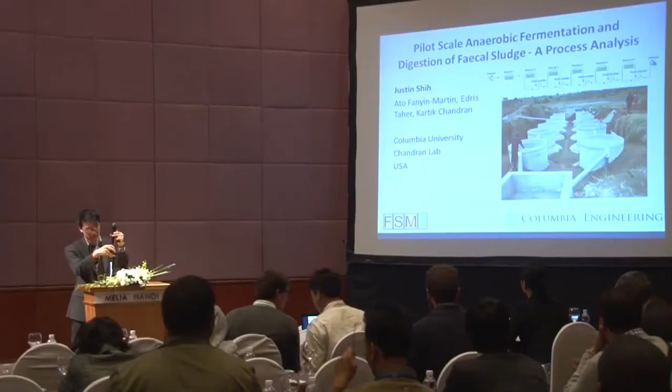Hello, can you hear me? Yeah. It's pretty clear? Yeah.

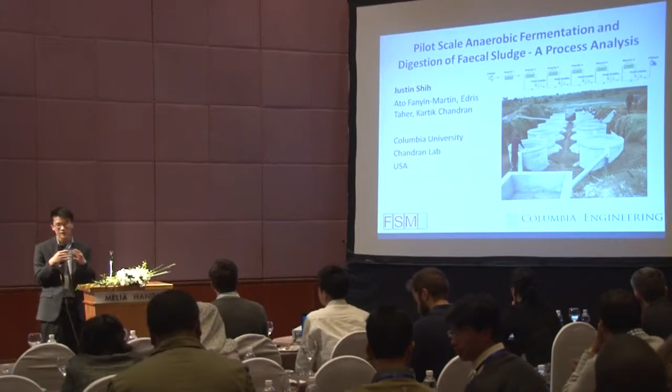Okay, my name is Justin. I'm with Columbia University with the Chandran Group. I want to begin by saying our group is pretty excited about being here this year because the work in Ghana has been in progress for the last 3 years. The first year was construction of the site and procurement of materials. Then a year of operation at the pilot scale, and the last year has been data analysis and modeling work. So we're really excited to finally be presenting it here. So thanks for being here.

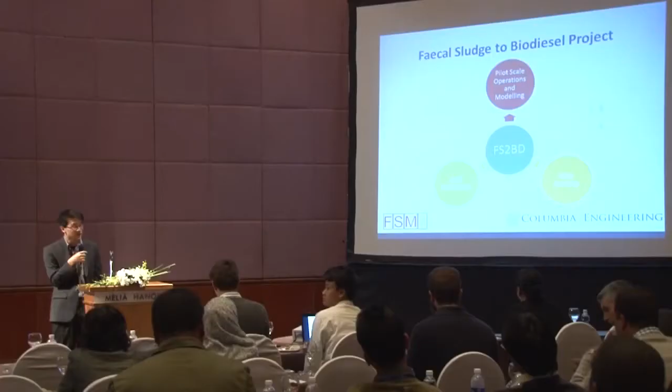So this project is the Fecal Sludge to Biodiesel project. There are actually going to be 3 sessions here at FSM about this project. Right now it's the pilot scale operations and modeling. Tomorrow morning, Kartik Chandran from Columbia is going to be talking about lipid production from VFA, and Ato Fanyin-Martin from KNUST is going to be talking about step feeding work that he did at Columbia. But today, it's pilot scale operations.

So why are pilot scale operations important? Worldwide we have a lot of anaerobic fermenters and digesters, but the scales are very varied, and there aren't many heavily measured, heavily monitored examples we can build from. With pilot scale fermentation, we can actually start looking at the variability of fecal sludge as it comes in. From characterization studies we all know fecal sludge is very variable, but in processes we're not incorporating that variability. Running at pilot scale, receiving about half a truck a day, we can actually feel, smell, and see all the variability coming in. So this is very beneficial for us.

Second, not only are fecal sludge concentrations varying, we also have to consider loading volumes. As everybody knows, vacuum trucks are all different: different ages, different capacities, and when they arrive on site they're not always full. So if you plan to take one truck or 2 trucks, you have to account for variable volume as well, not just concentration. And with field operations, unmixed reactors are what we're working with.

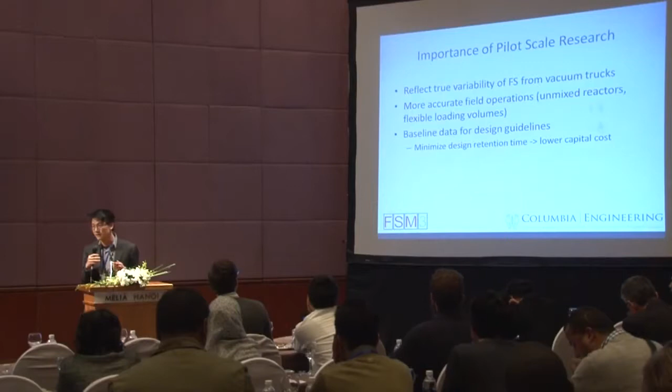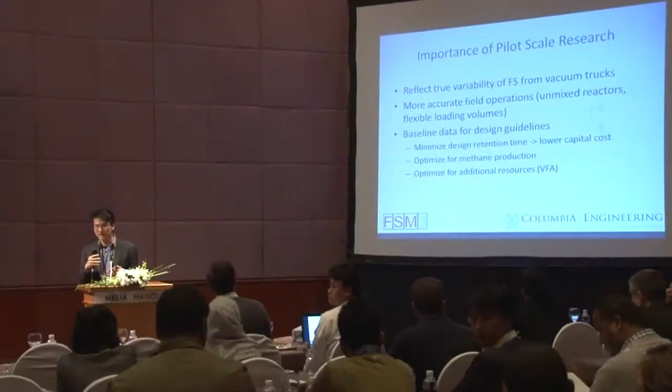All this pilot scale data gives us a baseline for what fermentation and digestion actually look like when processing at truck scale, which allows us to form conclusions later. In terms of design guidelines, sizing digesters by residence time is key, because a very large digester is expensive and somebody might not want to pay for it. So we specifically looked at how much retention time you need to optimize methane production, and how much for additional resources like VFA, volatile fatty acids. If we can limit reactor size, costs go down, and maybe this will be taken up.

Okay. So our project, we had a very strong emphasis on pilot scale field operations, but at the same time, we needed to incorporate process modeling with it. And the baseline data we got from the pilot, but the process modeling allows you to start answering questions about how do we want to size digesters for fecal sludge? How do we want to design these systems? Because right now, these guidelines don't really exist.

In addition, if you have a built system and you have a model for fecal sludge, you can start looking at how the reactors are actually performing and how to optimize them. So modeling allows for the before and the after.

Okay, a little bit of information about what we were doing at the pilot scale. We had 5 months of startup. We used rumen from an abattoir for the inoculation. We ramped up the loading. This was a 5-month period. In terms of full operation, we had 5 months of loading, sampling twice a week.

2 trains of 6 10 cubic meter reactors. In terms of operation, we're only using 1 train at a time. The second train allowed us for staging, it allowed us to clear some things out if we needed to. But the key point is 6 10 cubic meter reactors. So they're a good size. HRT is pretty low, 2 to 4 day retention time in each reactor.

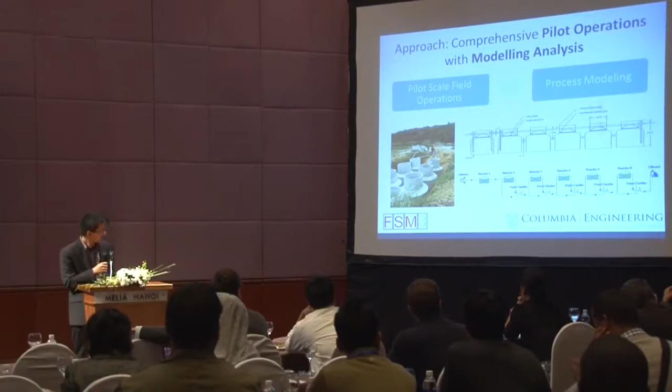I want to again emphasize realistic loading conditions. You'll notice we had 2 periods, period 1 and period 2, they were about 2.5 months. Period 1 had very variable loading volumes, and one reason for that is it coincided with the wettest 2 months of that year. There's very heavy rainfall, and trucks were pretty hesitant to come to our site. We were right next to a waste stabilization pond. It was getting really muddy. We had situations where trucks had to be pulled out by other trucks, so they didn't want any of it.

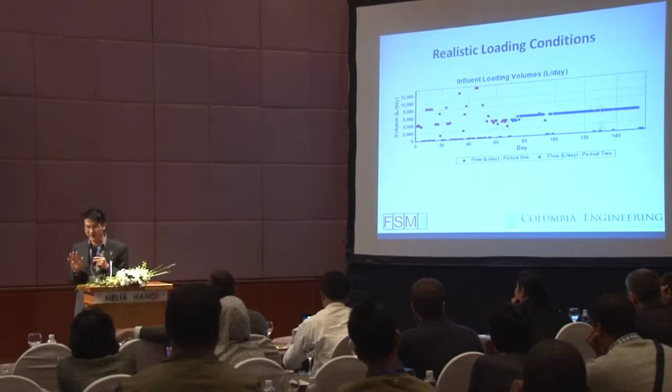And what this meant was we were trying to be very careful engineers, set loading volumes every day, but it's difficult in the field when you have to rely on trucks that are coming in. And so the volumes get higher and lower because if we missed days, then we would compensate by adding more.

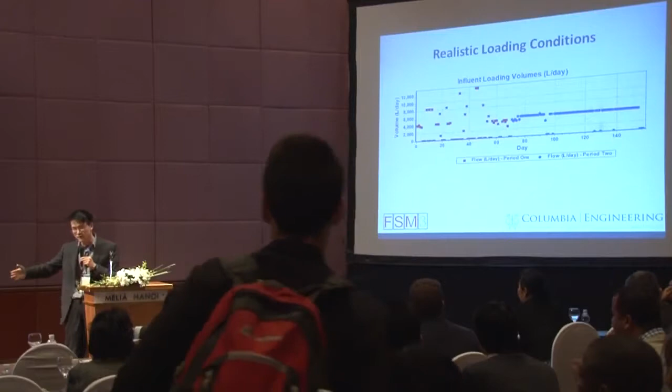Now, period 2, one explanation is I left after period 1 and somebody else started managing period 2. That's not the reason why. It was that the weather started getting drier, and we said, wait a second, we have another 2.5 months. This is a great opportunity, we have this variable loading. If we're really good for these 2.5 months, we can make this comparison. Because if you have to rely on trucks, knowing if variability is okay is something we really want to know. Right? What is the effect of loading volume variability?

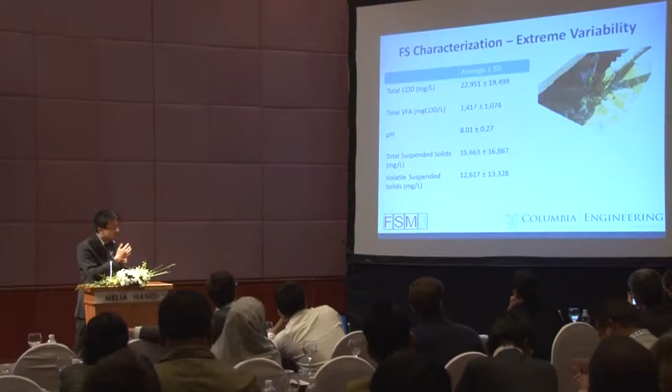Fecal sludge characterization, what we were measuring was pretty consistent with past studies. A lot of variability, so you have these average values, but the standard deviations are just as high. It's what we were seeing. So the VFA numbers were suggesting that fecal sludge was coming in pre-fermented, and to go beyond that, we suspected that it was also arriving pre-digested.

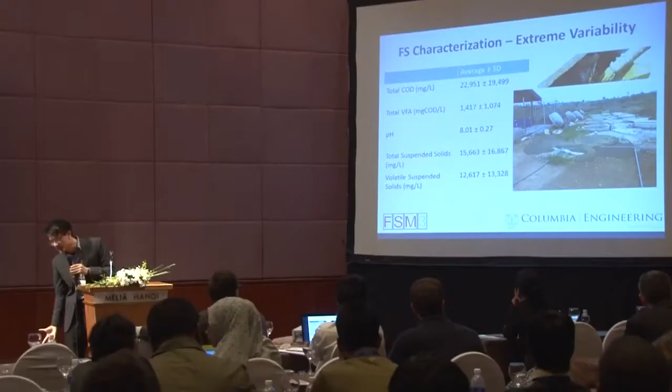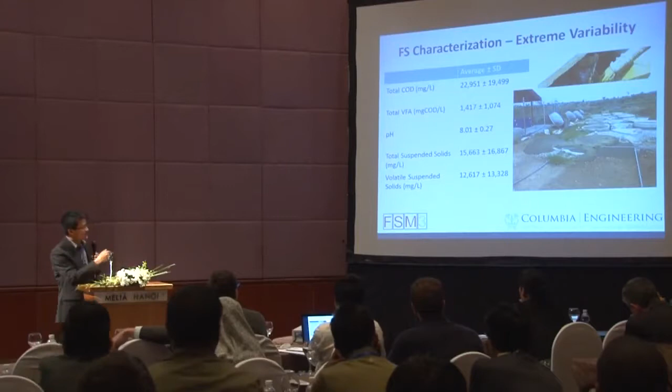And one piece of evidence is that occasionally we would load the site in the afternoon, and then in the morning we would see intensive digester foaming, all of this gas production, and we'd have to go and shovel up all of these things. And so this was one of the big sparks in our mind about what's going on in fecal sludge. What this is showing is it's very active material. It's not just sludge, it's the bugs that are eating the sludge. And this was suggested by these messes we had to keep cleaning up.

We can measure fecal sludge through regular parameters, but if we want to go deeper into design, we need to go beyond these. We need to think about what else is in the stream.

Okay, process modeling approach. So our approach for the model is we wanted to identify the key characteristics for fecal sludge and for fecal sludge fermentation and digestion. And what this basically meant was when we were adjusting these parameters, we were doing so very carefully with our knowledge of the anaerobic digestion process. Because in the end, we wanted to minimize the amount of adjustments we were making. We didn't want to adjust 20 parameters, 30 parameters to get some perfect model. We wanted to learn what was happening, what's different about fecal sludge, and what's different when you ferment it and digest it.

Evaluated through the calibration, we looked at COD fractionation, readily biodegradable and biodegradable. We looked at the influent microbial concentrations, heterotrophs coming in, methanogens. We looked at reaction rates for the 4 key parts of anaerobic digestion. And we looked at the solids distribution because we had an unmixed system, so of course we had some distribution. So these details, we don't really have time to go into them, but during the Q&A or afterwards we can really start getting into it.

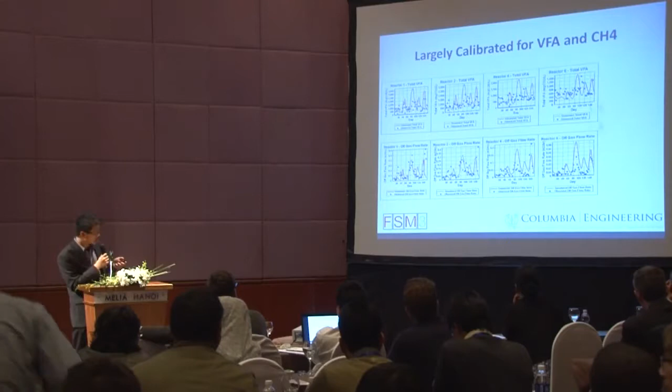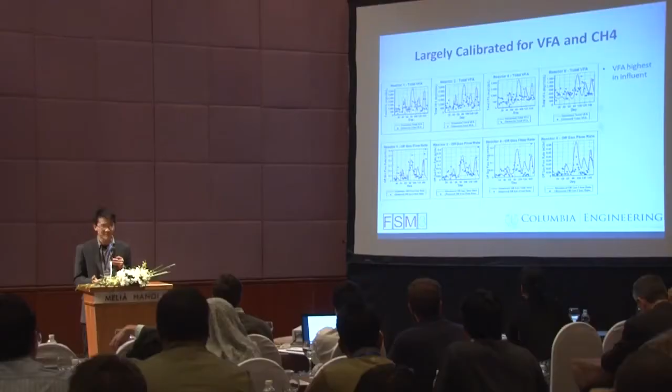What we found was VFA concentrations were actually highest in the influent. That 1,400 milligrams per liter, that was the highest, and it only decreased from there. And we were not expecting this. We were expecting high VFA concentrations in upstream reactors. We expect material comes in, and now you have your VFA, but that wasn't the case. For gas production, we saw maximum gas production in that same first reactor, which also took us by surprise because we were expecting gas production to be higher in the downstream reactors.

And so what both of these are suggesting is, again, the same point. Fecal sludge is active material. It has heterotrophs, it has methanogens, it has material in it that we need to consider. And because of this, that's why we then see VFA only going down and gas production. It's coming in with methanogens, now you're seeing it highest in reactor 1.

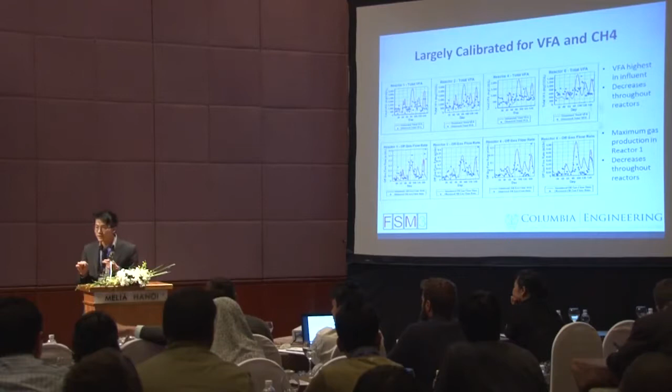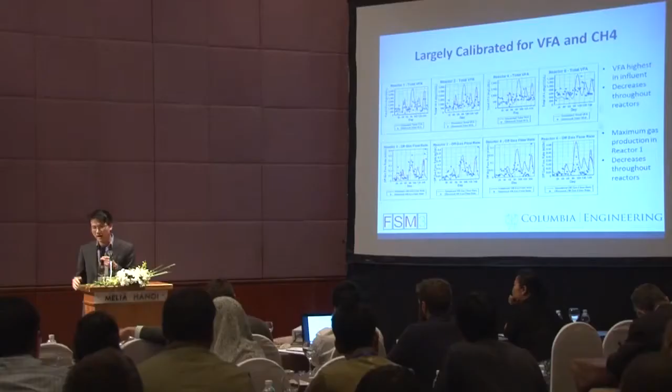And so if we're going to do a new design for fecal sludge fermentation, fecal sludge digestion, if you only care about gas production, you may not want to go for 15 days, 30 days, 60 days, which are the regular numbers. And we're not talking about pathogen reduction. If you're only caring about gas production, you're getting those high efficiencies right in the beginning, and it's something to keep in mind.

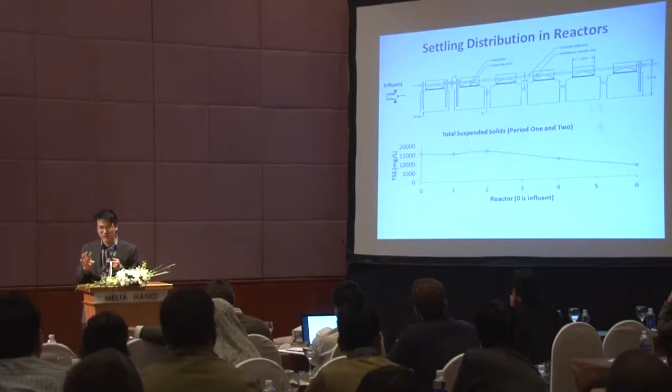The other point is, yes, we have this decreasing profile for gas production. But if you remember, we had an unmixed system. So we have decreasing solids distribution as you go there. And even when you normalize for the concentrations of solids in the reactor, and you look at gas production, you still see that from an efficiency point of view, it's highest in reactor 1, and it only goes down as you go down.

So we looked at, I forgot to mention, we looked at fecal sludge from public toilets. And I want to mention this: public toilets, that word public comes from the fecal sludge operators, those vacuum truck drivers that are coming in. They say we have public material, we have public material.

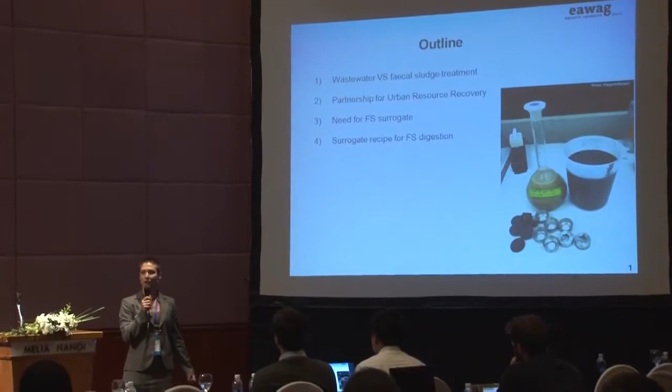First I would like to go quickly through the introduction, coming back a few years to look at how we have developed wastewater treatment compared with fecal sludge treatment. This will lead me to present the need for fecal sludge surrogates and how we can use them for anaerobic digestion.

We all come from the wastewater field, even though we are here to treat fecal sludge management, because all the treatment technologies we try to apply were actually developed for wastewater. But wastewater treatment wasn't developed in 20 years, it was developed over about 100 years, and we have been testing different solutions at different scales — large-scale, mid-scale, but also small-scale tests at laboratory conditions. The goal was to understand mechanisms and optimize efficiency.

And that's where I'm coming from. For fecal sludge, we still don't have very good efficiency, otherwise I think we would have something else to discuss than what we are all speaking about here. It's a quite new field of research — I would say the very first researchers began working on this in the 80s, so that's 30 years, not 100.

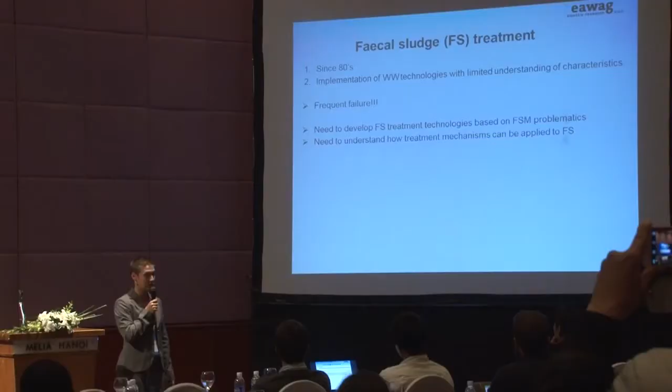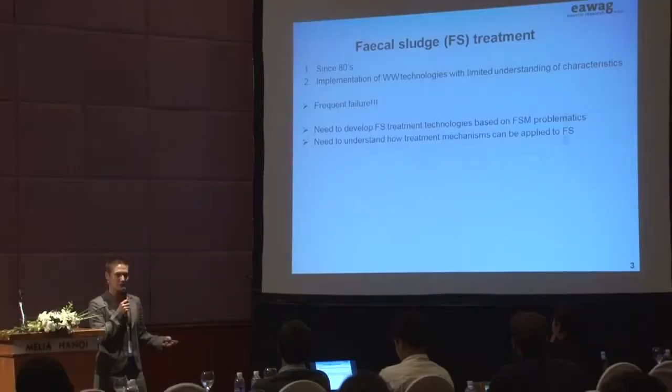We have been implementing wastewater treatment technologies for fecal sludge. That's something strange, and often we didn't really have time to see how this is actually implemented — how can we really use fecal sludge on wastewater technologies? We could observe lots of failures, for several reasons, but also sometimes technologies were simply not well adapted. So we concluded that we first need to develop fecal sludge treatment technologies based on fecal sludge management criteria, properties, and problems.

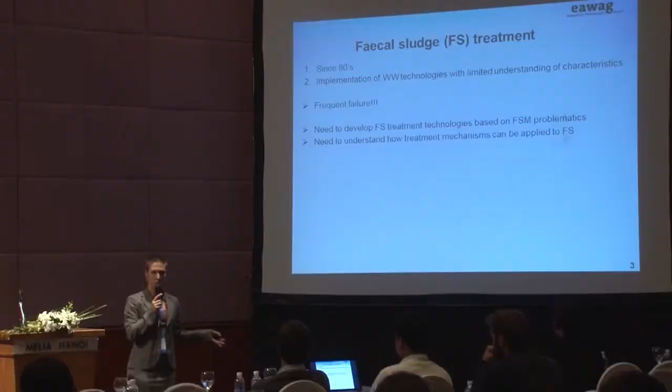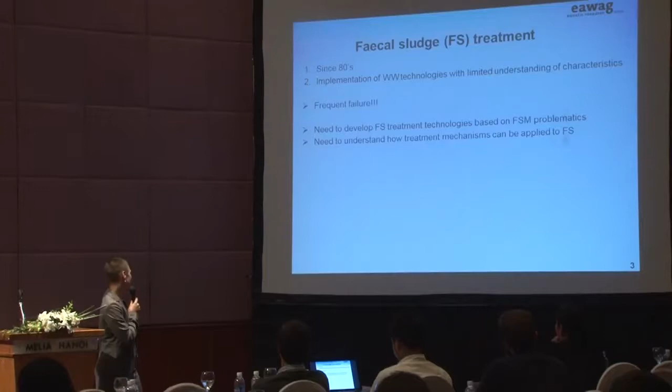That's quite logical, but also, as we have seen, there are different levels of tests, and it can be useful to have first small-scale tests. We need different types of scales, and small-scale tests can be used to understand how treatment mechanisms can be applied to fecal sludge.

So the point of my presentation today is that for wastewater treatment we have been using a lot of different surrogates, but we don't have these surrogates for fecal sludge. I have already been asked by several colleagues: do you already have your synthetic feces? We really want to use them — not only for anaerobic digestion, but also for other purposes.

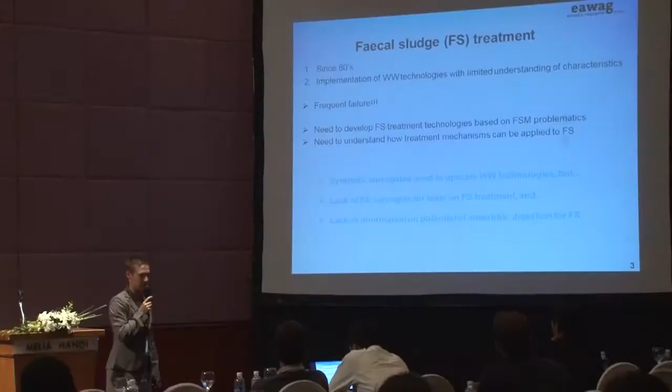As we have been discussing throughout this session, there are still needs for understanding in the field of anaerobic digestion of fecal sludge. Today I will mainly speak about fecal sludge from septic tanks. This is a liquid waste — it's important to note that — and it's liquid waste that is already partly stabilized, so it's not the same as the case from toilets.

I would like to present this quickly in the framework of a project I'm running here in Vietnam. It's also interesting because it's based on the Vietnamese situation. The project is called Partnership for Urban Resource Recovery, and its main goal is to assess the potential for anaerobic digestion of fecal sludge. All of this is considered at a centralized scale, not at the scale of a single toilet.

We are conducting several activities. I don't want to go through all of them, but today I will focus mainly on optimization of anaerobic digestion for fecal sludge. To really understand process efficiency and how we can optimize it, we need a constant substrate to do the first tests. I see heads shaking, I don't know if that's yes or no, but this can be useful to understand what mechanisms are actually efficient in producing biogas, inactivating pathogens, or degrading biological matter. It's also sometimes useful to perform tests without changing external conditions.

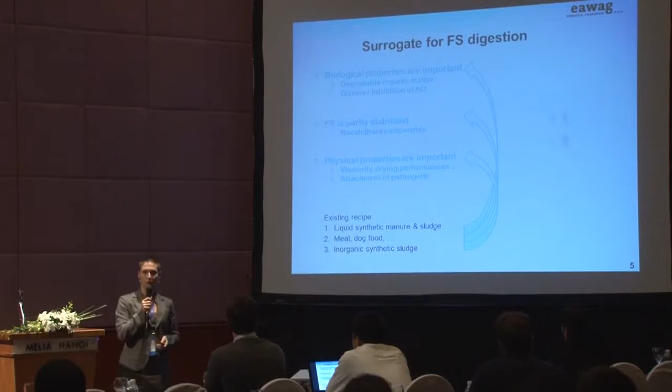So until now, we still lack the perfect recipe, I would say, which I will now present you today for these tests. The objectives of our work was to develop a recipe for reliable and replicable tests representing biodegradation potential, heterogeneous solid content, and also being able to adjust it to different fecal sludge characteristics. Our goal was also to have controlled and safe-to-use components so that anyone can do it in different countries, and to obtain a recipe that is easily and rapidly reproducible, again in different countries. Finally, of course, as I said, I would like to use it on optimization of anaerobic digestion, and that's what's coming now.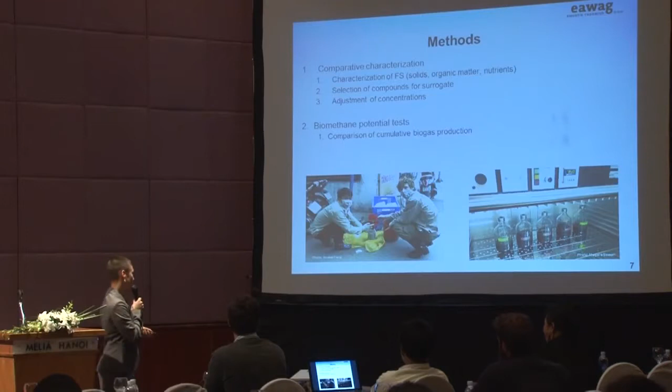We could actually do that. That was the first step, but we also wanted to verify that these similar sludges would have a similar behavior when we put them in the digester. And we wanted to monitor that through biogas production. So we also conducted biomethane potential tests. Thanks to our previous presenter, so that I don't need to present the whole methodology now.

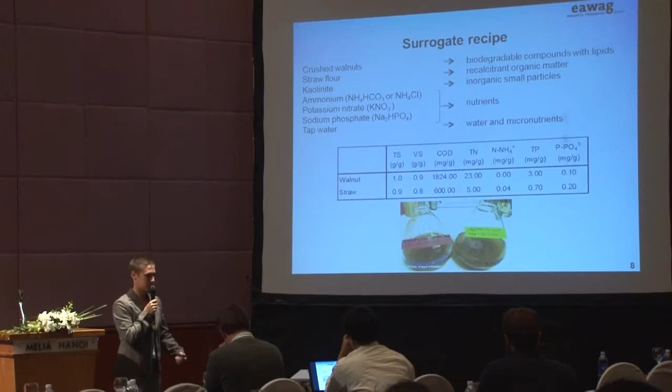And that's the surrogate recipe we obtained. So it might be funny, but that can be useful too. We used crushed walnut and straw flour. Straw flour mainly representing recalcitrant organic matter, and crushed walnut representing more available organic matter and accounting also for lipids. But you can use other kinds of vegetables. We use kaolinite to represent inorganic small particles, and different chemicals can also be used to represent nutrients. And of course, the water content can be adjusted based on water. You can just see here some characteristics of walnut and straw, which are interesting because they are quite different, and that makes it easy to mix to reach different characteristics.

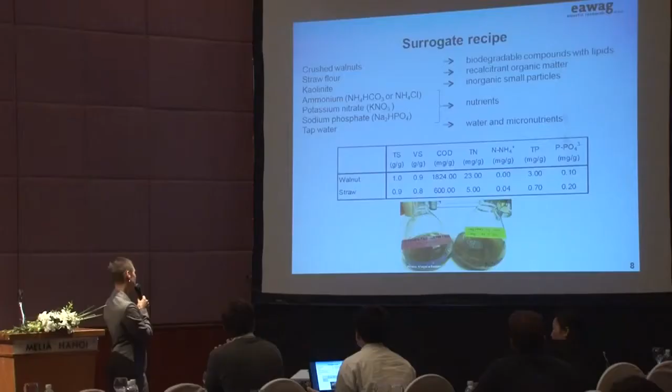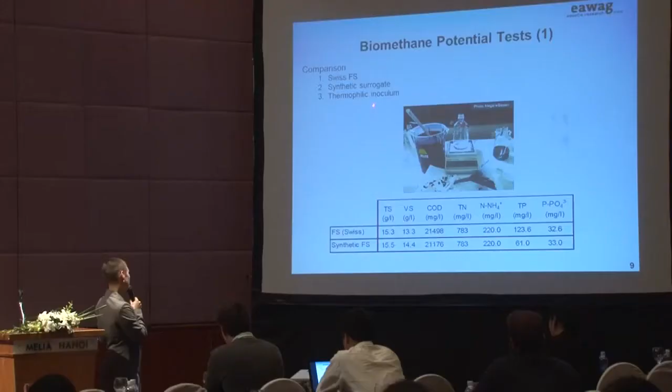The biomethane potential test we did in Switzerland, and we did that with Swiss fecal sludge, so also from septic tank, and therefore we had synthetic surrogate adapted to this Swiss fecal sludge. We conducted the test at thermophilic temperature, so at 55 degrees, and you can just see here that we could obtain similar properties between the Swiss fecal sludge and the synthetic fecal sludge, except for total phosphorus.

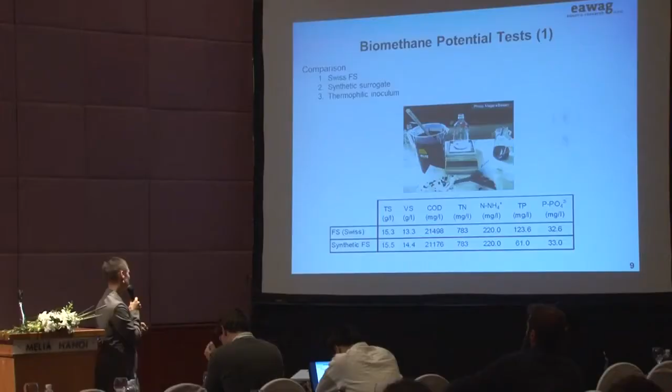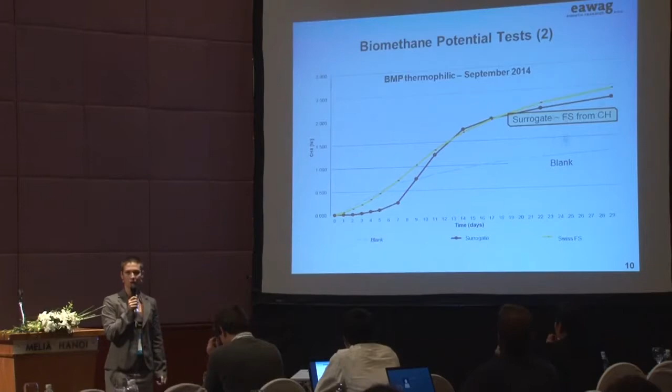We had other results, but just to quickly present you. I hope you see the line for the blank, which is here. So the blank was only thermophilic inoculum, the production just due to the inoculum. Something interesting is that first, we have actually production of biogas with fecal sludge from septic tank, which is very often discussed because people often think we can only produce biogas with fresh fecal sludge, but actually also with partly digested fecal sludge you can produce biogas based on this data, which is very limited data.

With similar characteristics, we obtain similar biomethane production between 10 and 30 days of digestion. That's only one test, so we will conduct more. But we had different behavior at the beginning, where we had inhibition due to probably VFA accumulation in the surrogate. So this is something we can fix. But the interesting thing is that at the end we have similar production for similar characteristics.

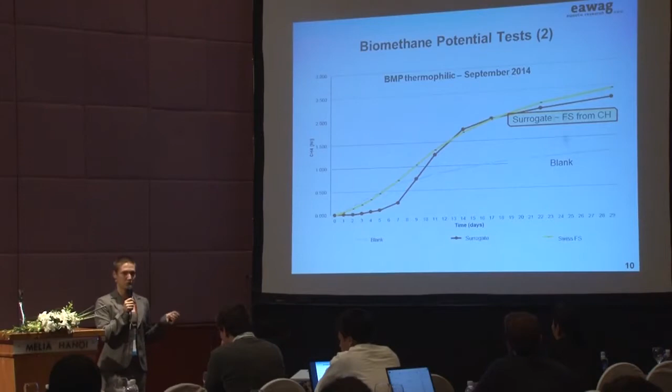I will be using these, so that was just a side study to perform more tests. The goal of this study is to adapt different operational and configuration setups of anaerobic digestion in order to reduce pathogens. We all agree anaerobic digestion is not the perfect technology per se to completely inactivate pathogens, but different setups exist to improve inactivation. So I will be using, for example, biphasic anaerobic digestion, and these tests will be performed based on fecal sludge characteristics in Hanoi, but with synthetic surrogates, so we can perform tests in Switzerland for fecal sludge of Hanoi at very small scale.

I would like to conclude that we all agree implementation is crucial, it's very important, that's where we are all heading, but it's also expensive and sometimes it can be useful to have preliminary tests. Synthetic surrogate can contribute to understanding treatment mechanisms and obtain quantitative data in controlled conditions. It can also be used to test new substrates on known technologies or new technologies. And it's quite low cost optimization that can also be used, for example, to test one technology setup for different contexts. So I could test my setup based on characteristics of fecal sludge from Hanoi, but I could also test the same setup based on characteristics of fecal sludge from Dakar or any part of the world, as soon as I can adapt the synthetic surrogate. That's just an example of something that can also be useful for other technologies.